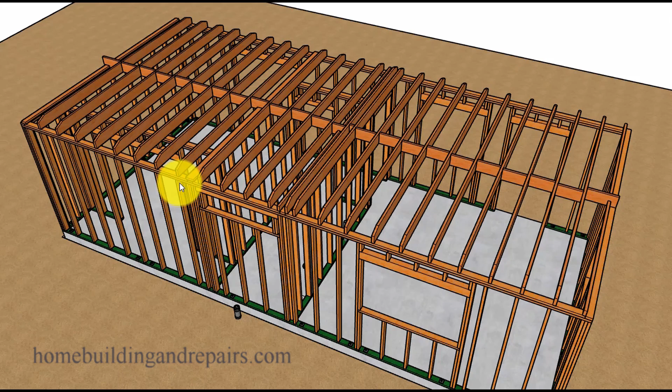Welcome to another one of the videos in our series on how to build a small house that's 434 square feet. Since this is a small house, I'm going to go ahead and do the roof and the plumbing all in one video. What we are looking at here are 2x6 roof rafters that are 24 inches on center.

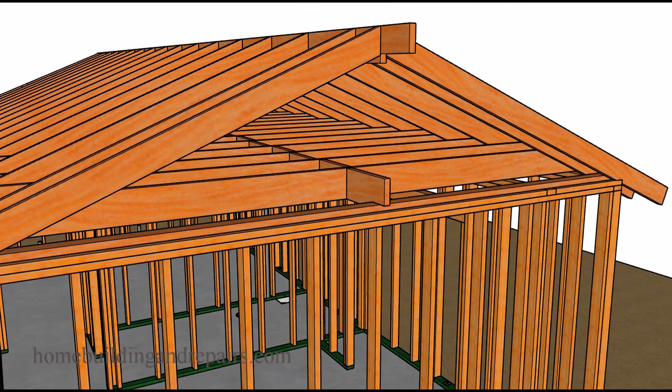As part of this series, I try to show you something different during the video. In this one, I'm going to show you how the gable studs might need to be notched at the bottom if you put flat backing down. So we can see here where the gable studs are notched over the backing. It's probably going to be better to put the backing upright, as you will see in a few minutes.

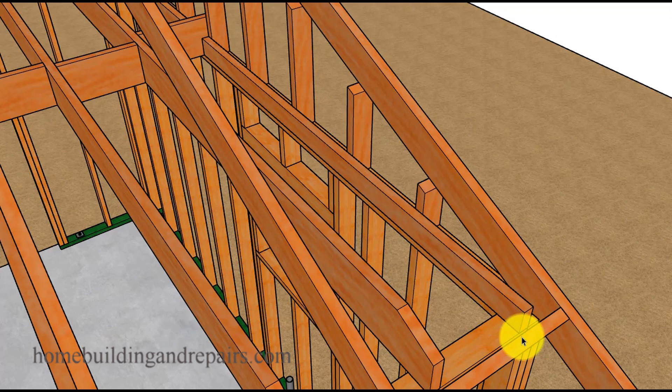Now let's take a look at our blocking, 2x6 blocks that can be painted before or after you install the roof sheathing, and the 2x4 I was talking about, how we turn it up in the same direction as the ceiling joist, and then we can nail the backing to the gable studs.

The gable studs are spaced 16 inches on center, starting from one in the center. However, if you are going to put a gable vent here, you might want to offset two of them in the center so you can put a gable vent in the center. This method provides us with a way to support the ridge.

I'm also nailing one of the ceiling blocks to the 2x4, and it's going to toe nail into the top plate. The backing is going to nail into the block, and this can help stabilize this wall.

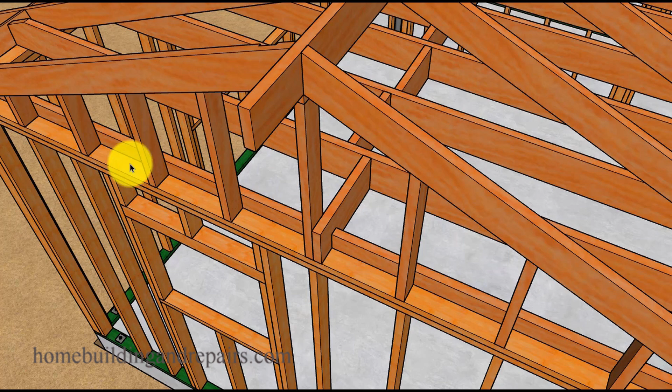You can always put a strap across here and line these blocks up, or even put these blocks 24 inches on center or 4 foot on center, or in this case just put one more block on each side in the center, or equally spaced, to provide a little more structural stability for this wall, kind of tying it into the ceiling.

Now let's go ahead and put our fascia board on, and if you notice I do not have any lookouts here. You can always put them in, but I really didn't feel it was necessary for an 8-foot span here. Again, I'll leave that up to you.

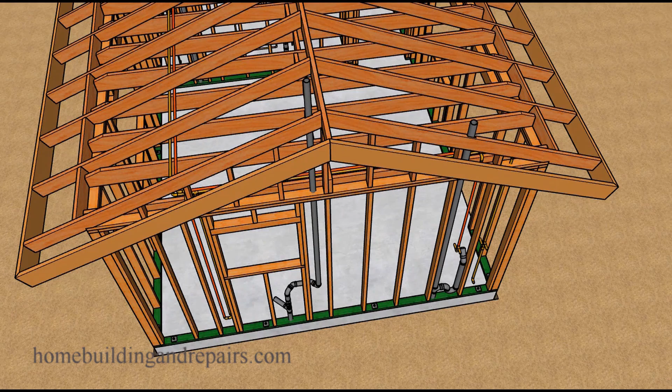Next up, let's go ahead and install the plumbing. We will be using copper for the water supply lines and ABS for the drain pipes. We are going to get started in the section where the water is coming into the building. This pipe right here will supply all of the water you need to the house.

Usually you will have some type of water shutoff valve here, and a line that will connect to some part of the property where you have water. This could be another building or even all the way back to the water meter. The line is going to go to the area right here where we're going to have our tankless water heater.

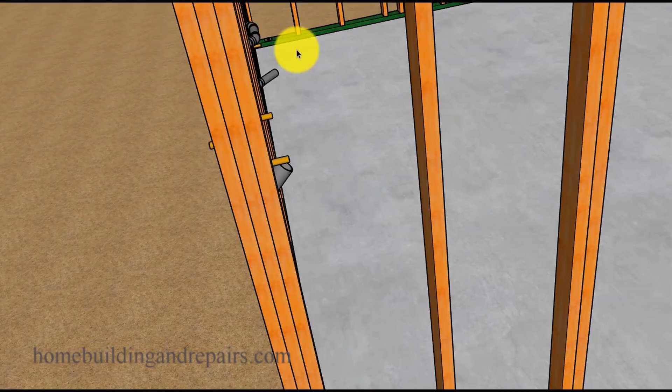So even though I'm not showing the water heater, the cold water will come into the heater from here and then go through all of the hot water pipes. To make things a little more convenient, I went ahead and colored some of these pipes red to represent the hot water, so keep that in mind while looking at the project.

For some of you this might not be a problem, but usually the hot water is located on the left and the cold water on the right. However, I don't worry about that too much on my projects, as long as you can mark the hot water and the cold water somehow. But I do need to point that out so you can make the necessary modifications to correct everything.

Let's go ahead and take a look at the pipes running through the ceiling. This is all 3/4 inch pipe until we get to the bathroom. When I say 3/4 inch pipe, I'm running it all the way to the bathroom, but you can always run 1/2 inch pipe from here down.

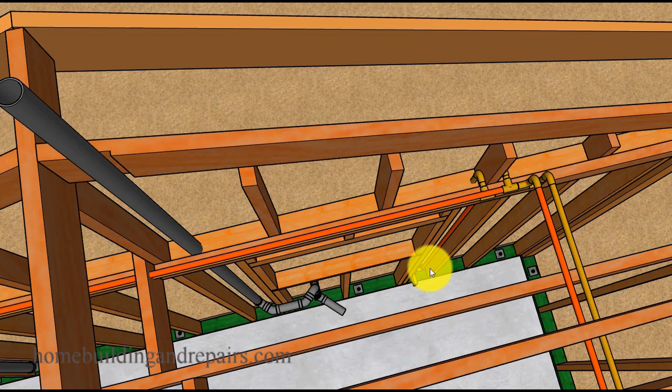Realistically, if you don't mind flushing the toilet while someone's in the shower and then all of a sudden giving them a burst of hot water, you could probably run 1/2 inch throughout the entire house without any problems besides that one. Now, the reason why I went on this side of the window with the water supply...

...was because this area was a little busy with this one pipe here. So I could have got the water pipes around here, but what's the big deal? Just run this a little bit farther, come on down, and then shoot it across here. And again, as always, you can change this stuff. I'm just providing you with one way to do this.

In this example, I have the drain on this side of the window trimmer and the window king stud, because most building departments don't want you to drill a big hole through this, so you need to go around it. These pipes might need to come into this bay a little bit, but I don't think they're going to have to, because I looked at the floor plan and it looks like it'll be a few inches into the cabinet.

However, if you need a little more room, feel free to drill your holes through here and move the plumbing over. Keep in mind that some of this is meant to provide you with other options, because what I'm trying to do is create a group of videos with a variety of different plumbing and framing scenarios.

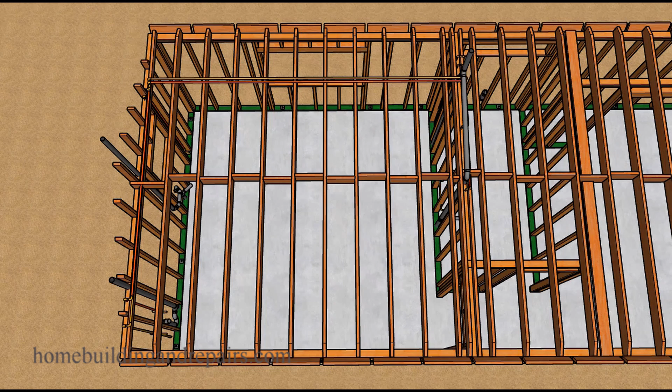Now here we have a clean out, and this clean out is going to clean out quite a bit of the pipe and is located in a good spot. You can always go back and look at the foundation plan. I believe that's about the second or third video in this series, where we have the plumbing coming down under the slab and then picking up the wash machine pipe and coming all the way over to here and out the building.

So this clean out here will clean all of this out if there's ever a problem. And the clean out in the back here will clean this pipe out if there's ever a problem. Pretty convenient. Now let's go ahead and remove the ceiling joist so we can get a better view of the plumbing here.

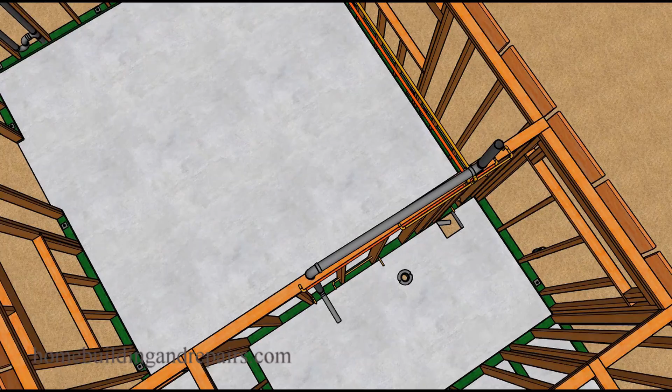So again, we have the cold water coming in and then feeding the bathtub and shower combo unit. And here's where we have the 3/4 inch line tying into a T that shoots off two 1/2 inch pipes in each direction. That works for the hot water and the cold water in this situation.

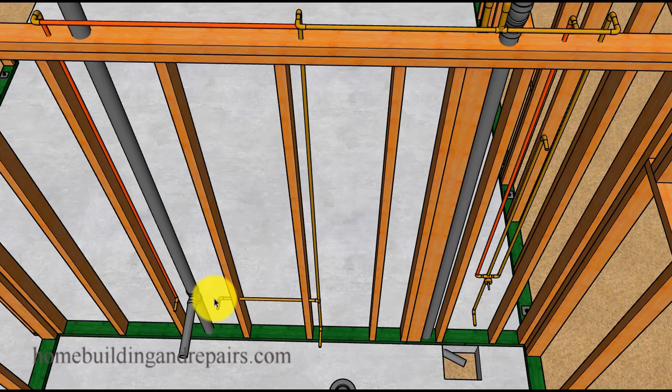So the cold water is coming down here and feeding the shower valve. It splits off at the T and comes down here, picks up the toilet, and then goes over to the bathroom sink. The hot water is coming up here over to the T over here, and you'll probably get a better view of that a little further in the video.

Here we have the bathtub and the shower shut-off valve. This one goes to the shower, this one goes to the bathtub. Go ahead and take a look at the shower. Next up, let's take a look at the toilet.

So here we have the water supply for the toilet and then the water supply for the sink. This is the cold water. Another view of it there. The sink, the hot water, and the cold water.

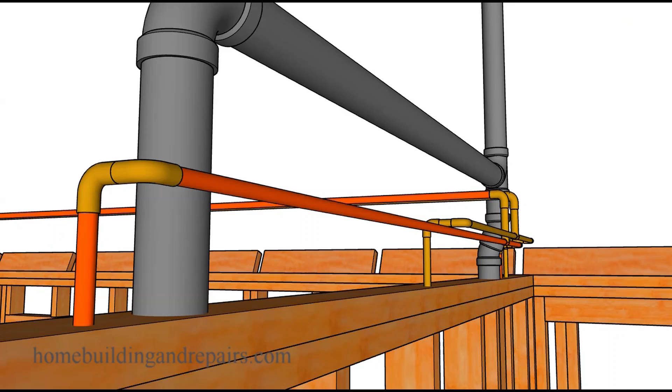Hot water going around here, and here we have the vent for the sink, which I'm keeping at 2 inches because I'm also using it as a vent for the toilet. So both of these are at 2 inches, where normally you could have another vent for the toilet separately and then use 1.5 inches for your vents here and a 2-inch vent for the toilet. And I have the sanitee turned upside down for the vent.

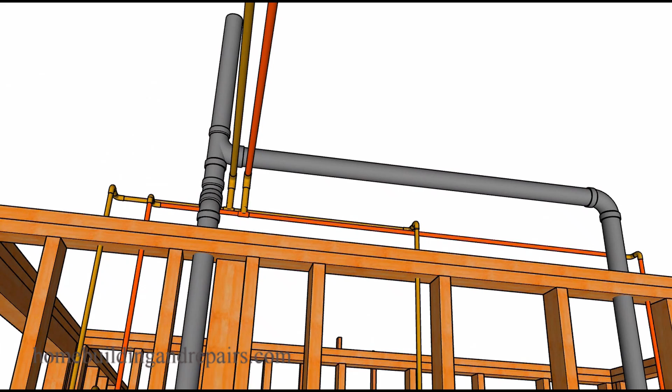And here's another view of the plumbing where the hot water is coming into a T, 3/4 inch, and then splitting off into two 1/2 inch water lines. Let's throw our framing back in, fascia board, and that is it for our plumbing.

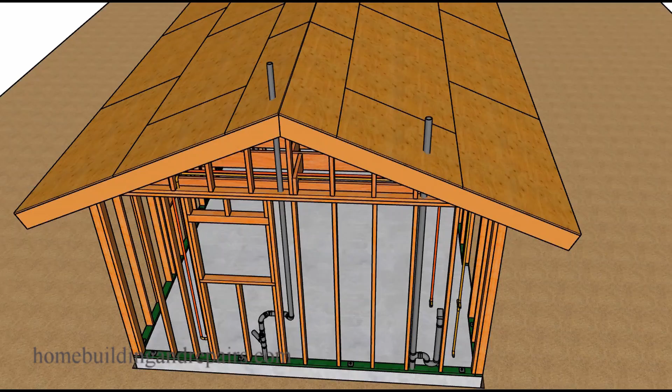Let's go ahead and take a look at the top of the roof. And since we're here, we might as well sheet it. That's how fast we can sheet this thing on the computer model. Let's just go ahead and take an exterior tour to get an idea how the plumbing pipes come out through the roof. As always, we are coming to the end of our video here.

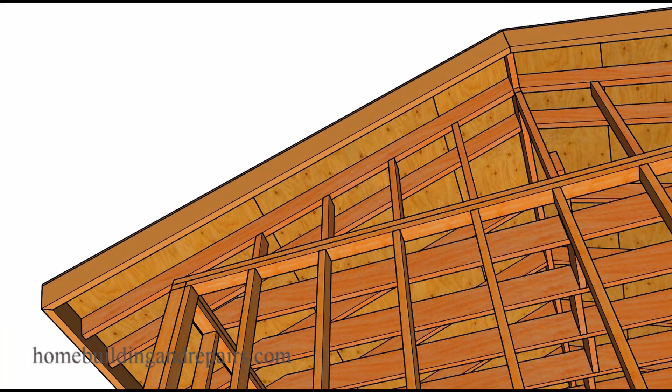The last thing I want to point out in this video is to consider using some type of exterior grade plywood or even OSB, something that you're going to be painting, because this is going to be a finished section of the house. Again, I will leave that up to you, whether or not you take that advice. And that is the end of the video.